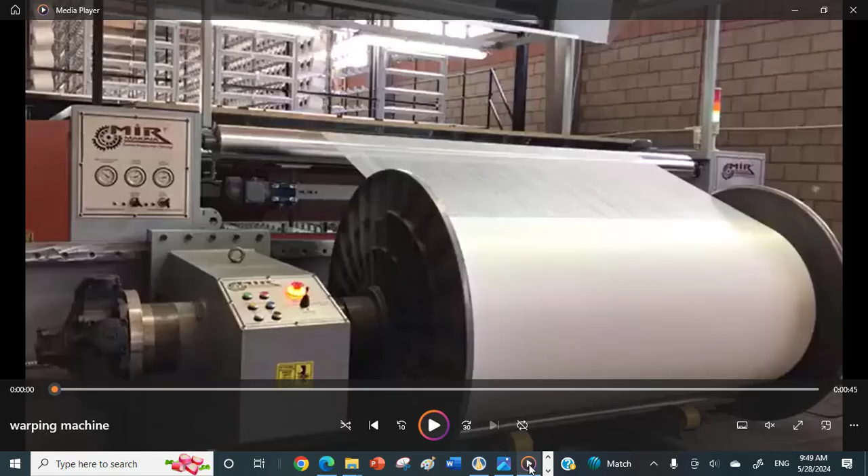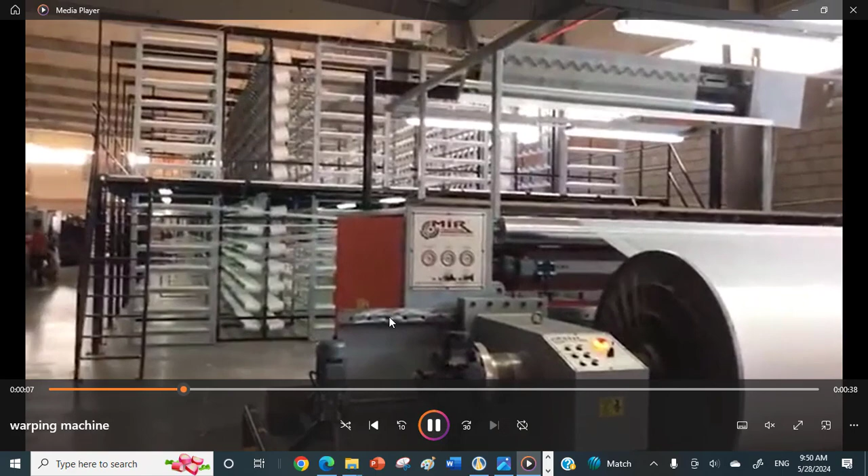So here I'm going to show you a short video about this warping machine. You can see here the beam, and this is the hydromotor - an axial, or I can say radial, piston motor - and this is the control unit. Here is the creel section, the hydromotor, the control section, and the beam.

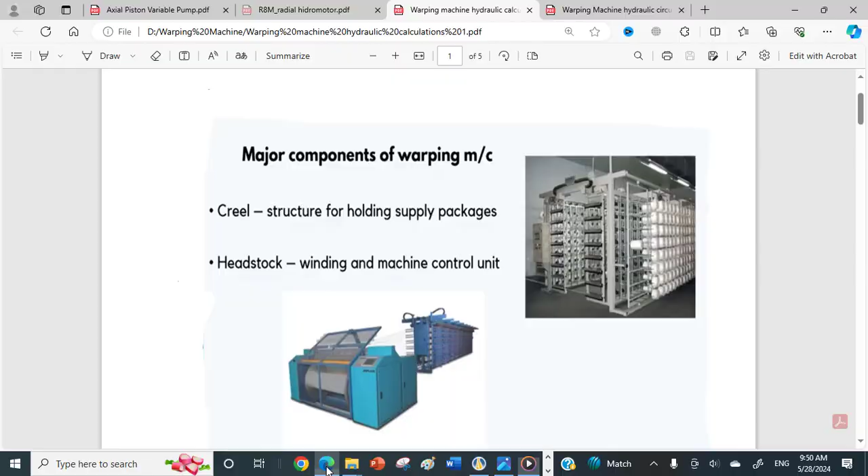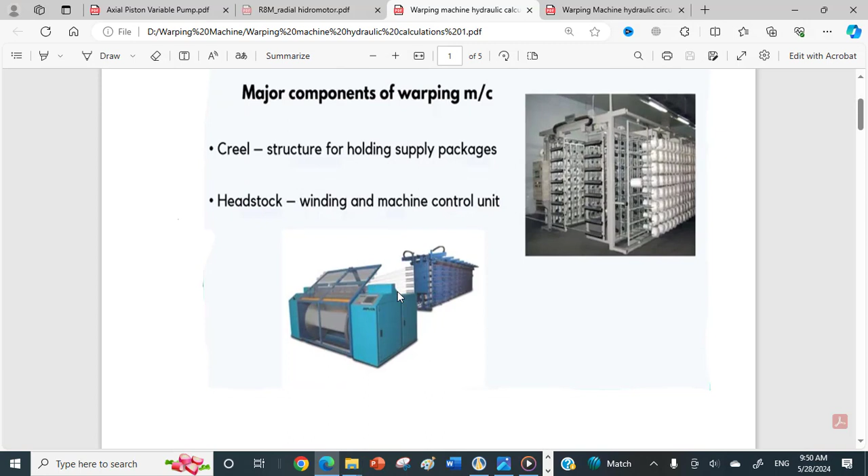So, the warping machine hydraulic circuit is like this. You can see here that the warping machine has this hydraulic circuit. This hydraulic circuit is composed of two sections.

The first circuit is for the hydromotor - as you saw in the video, this hydromotor has to be driven by a hydraulic pump and electromotor. And the second one is for the positioning of this drum or beam.

So this one is an arm, a hydraulic arm or hydraulic cylinder, which is used for lifting and positioning the warp drum, adjusting the tension, and loading and unloading this beam.

In this video, I will not talk about this section. In the second part, I will talk about this section. But in this first part, I will talk about the hydromotor circuit.

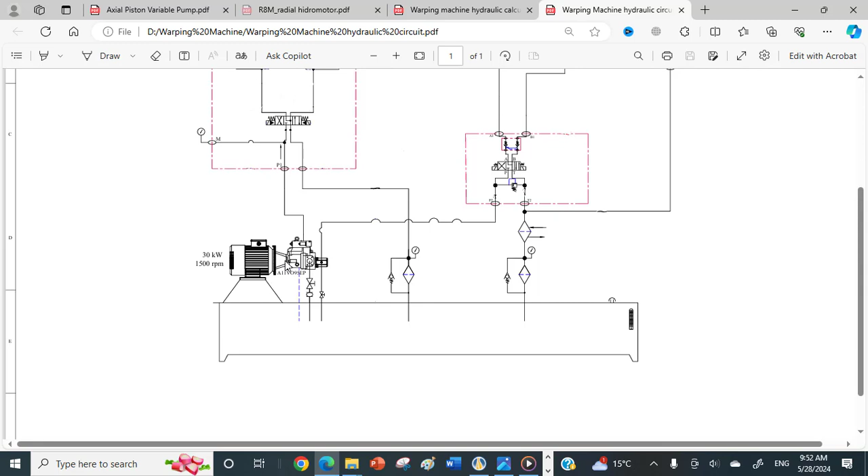As you see here, this is the tank, and this is the electromotor. The electromotor is used for driving the pump, and the pump here obtains the oil from the tank and pumps the oil throughout this block.

What is inside this block? Inside this block we have a directional control valve - a four-way, three-position directional control valve that is operated by a solenoid. You can see here the symbol for the solenoid, and this is the symbol for the spring. It means it is operated by a spring and the solenoid.

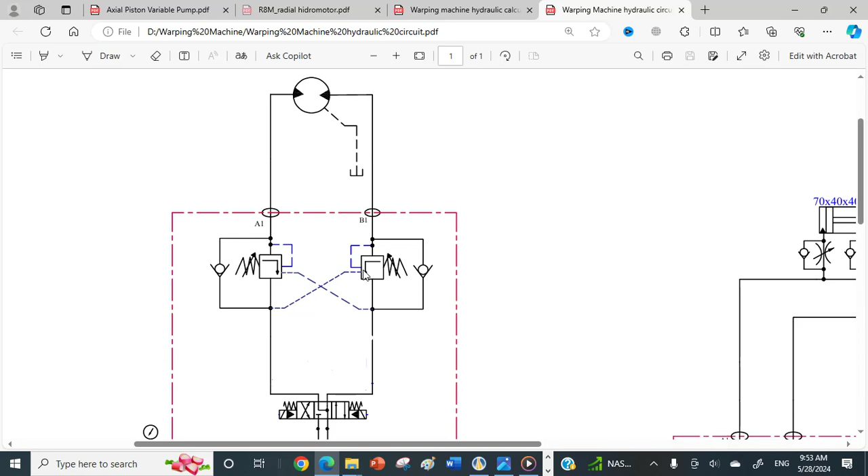And what are these? These are the counterbalance valves, used for braking this hydromotor after it's been stopped. I will explain in the next section why we are using these counterbalance valves and how they are operated. So all of these counterbalance valves, the directional control valve, and the pressure meter are located, and all of these ports are located inside a block.

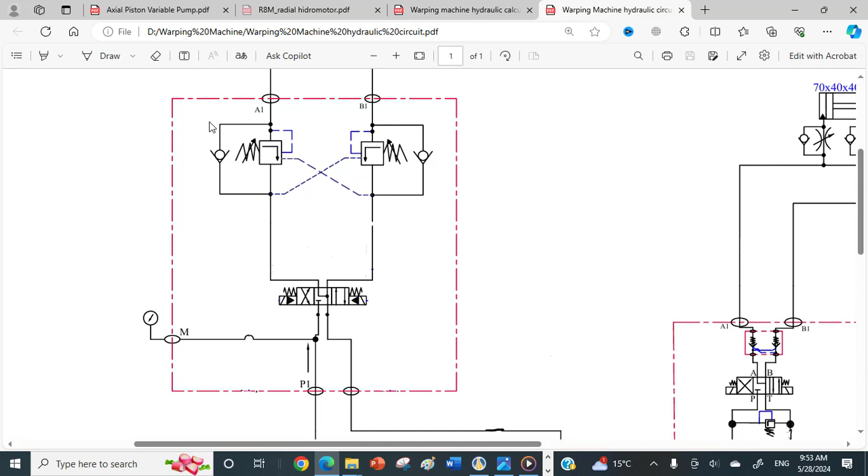Let me explain the counterbalance here. What is this counterbalance? As we know, when we keep the lever of this four-way three-position directional control valve in the middle position, the motor will stop. Obviously, the motor will stop because all of these ports are connected to each other, and there is no pressure here.

Even if there is pressure from the pump, it will go back - the pressurized oil will go back to the tank. So in this section, whenever the directional control valve is in this position, we have two main issues.

The second issue is that the motor may overrun due to an overrunning load, and the load may fall, because this hydromotor is connected to a shaft and to the drum or beam. Obviously, the drum and shaft are very heavy, and they can fall, or because of inertia, the motor continues to rotate for a considerable amount of time before it comes to rest.

It means that whenever the motor is running in reverse or forward direction and we stop the motor, the motor, because of its own inertia, will continue to rotate, and that is a problematic issue.

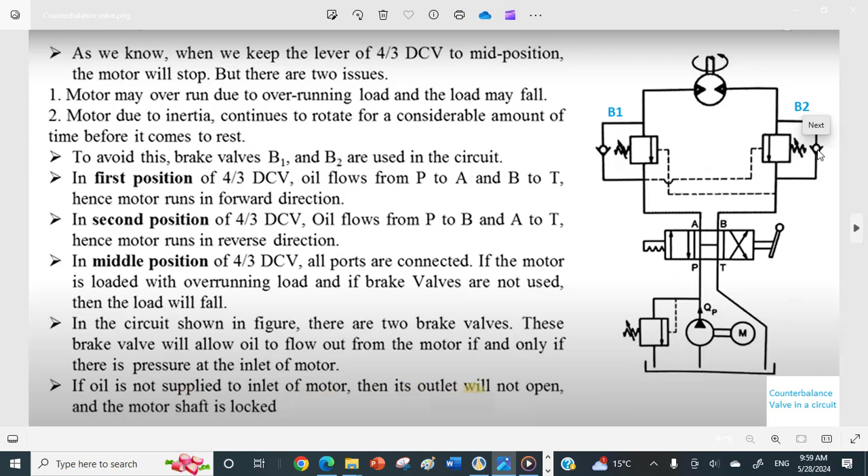And again here, this pilot operated valve, since there is no pressure here, the pilot oil will not make this valve open. And again, this check valve here is already closed, so the oil will be trapped. So the motor itself and its shaft will have no space to rotate, and it will be locked in place after being stopped, after we change this directional control valve to the middle position.

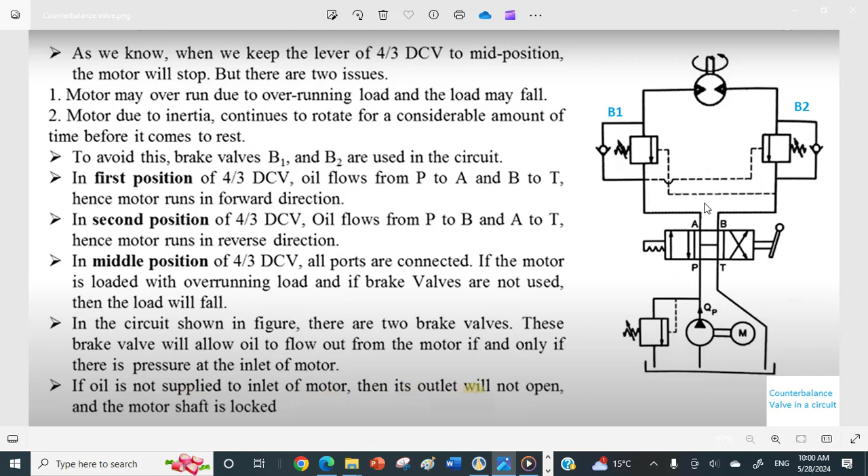So in the next section, we want to discuss how we can select this hydromotor, the pump, and the electrical motor to make this circuit work. We have to calculate all of these requirements for this specific warping machine hydraulic system.

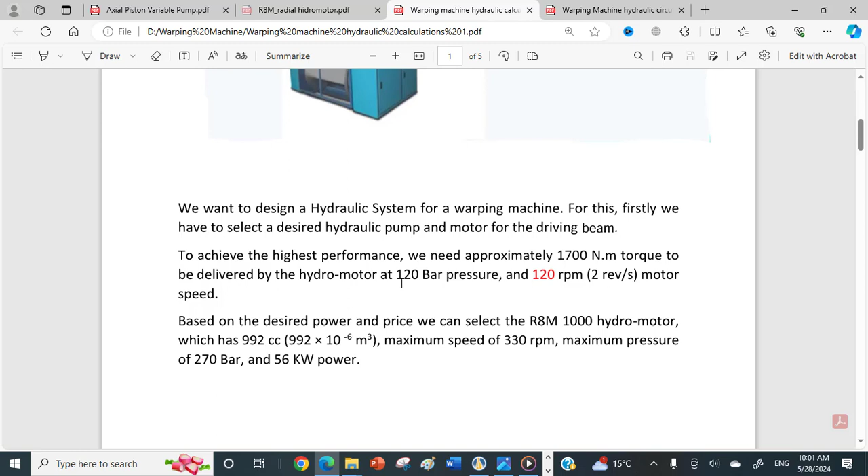So here, we want to design a hydraulic system for a warping machine. For this, firstly, we have to select the desired hydraulic pump and motor for the driving beam. To achieve the highest performance, we need approximately 1,700 Newton meter of torque to be delivered by the hydromotor at 120 bar pressure and 120 RPM, which means 2 revolutions per second motor speed.

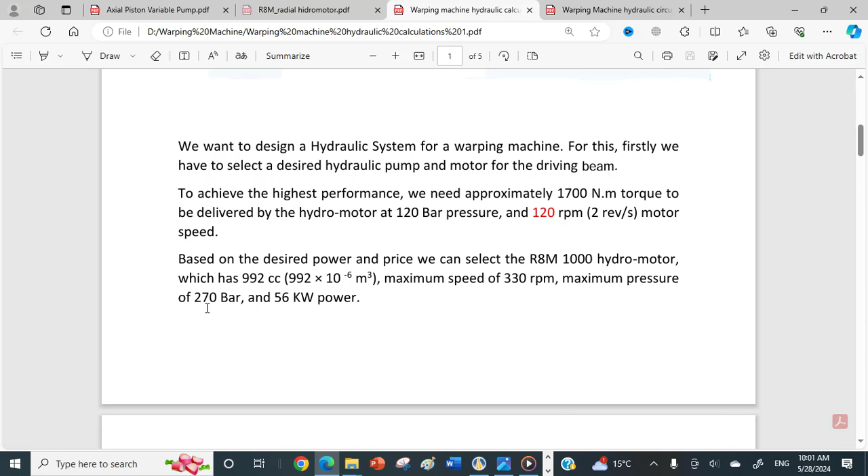Based on the desired power and price, we can select the R8M1000 hydromotor, which has 992 cc, equal to 992 multiplied by 10 to the power of -6 cubic meter. Maximum speed of this motor is 330 RPM and maximum pressure is 270 bar and 56 kilowatt according to its data sheet. This is the technical data sheet of this motor.

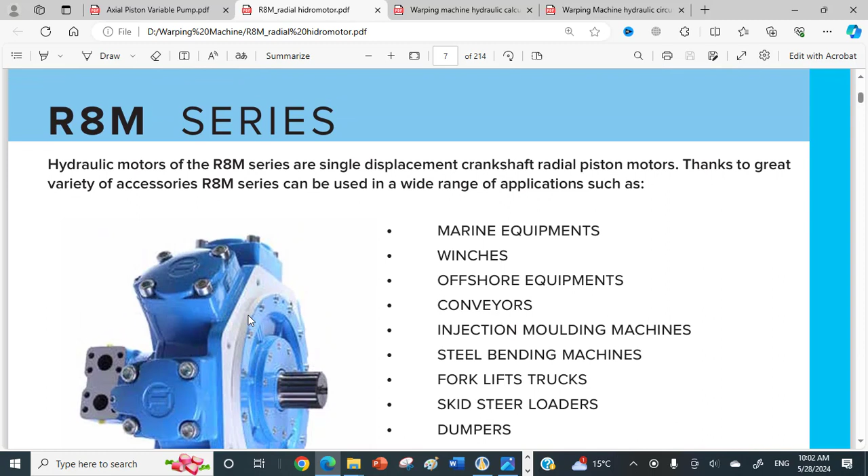These motors are applied in marine equipment, winches, conveyors, injection molding machines, steel bending machines, dumpers, agricultural and forestry machines, airport machinery, etc.

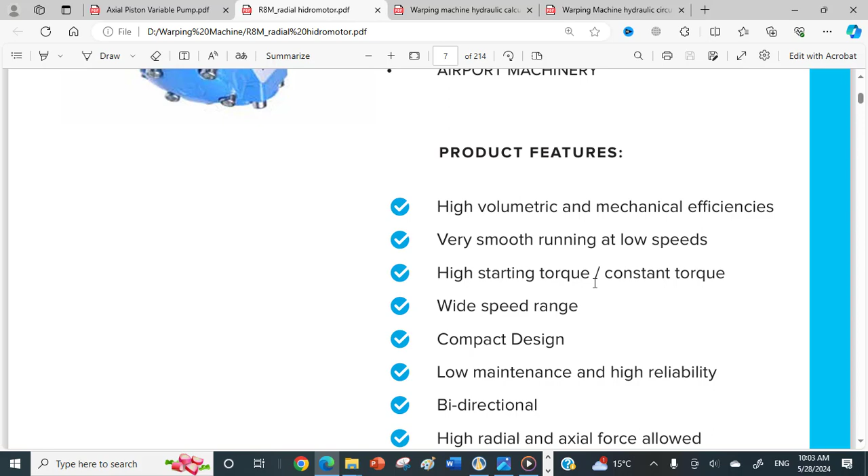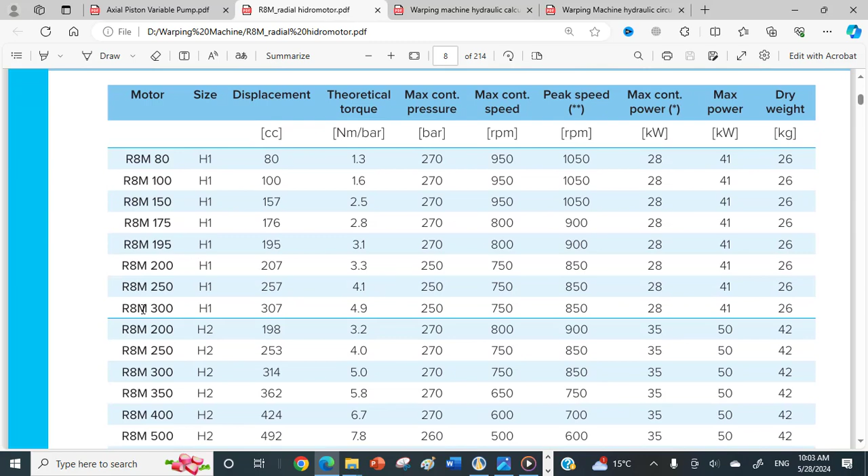So you can use this, and it has such product features: high volumetric and mechanical efficiency, very smooth running at low speeds, high starting torque, constant torque, wide speed range, and etc. All of these series of motors have been provided here with their technical data.

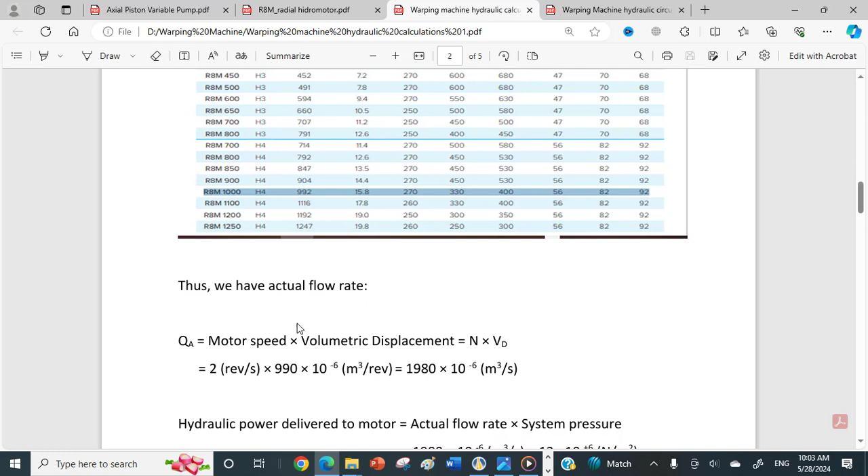So we just selected this one. Accordingly, we have actual flow rate. How can we calculate the actual flow rate? The calculation of actual flow rate is very easy. It is equal to motor speed multiplied by volumetric displacement, which is equal to N multiplied by VD, or volumetric displacement.

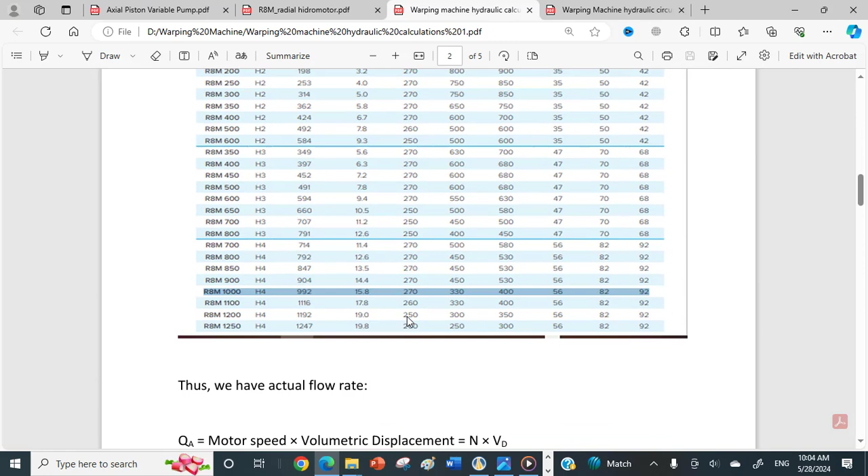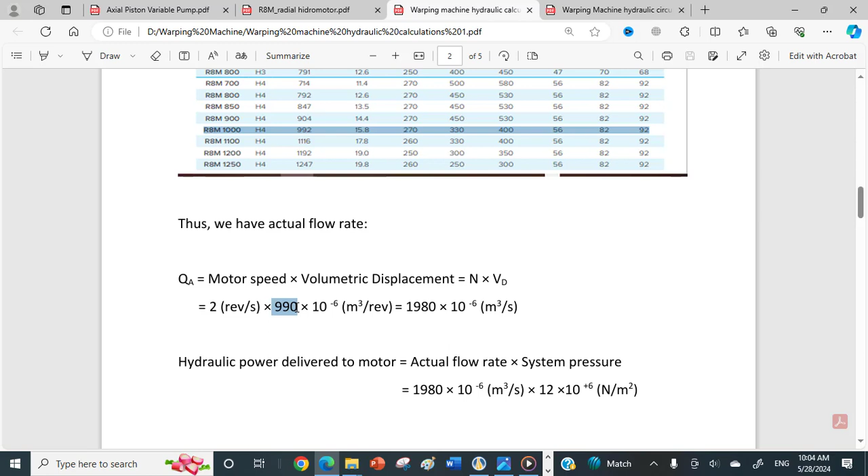So we already know that the motor speed is 2 revolutions per second, which is equal to 120 RPM, multiplied by 990, multiplied by 10 to the power of minus 6 cubic meter per revolution, which is equal to 1980 multiplied by 10 to the power of minus 6 cubic meter per second. So here we just converted cc to cubic meter.

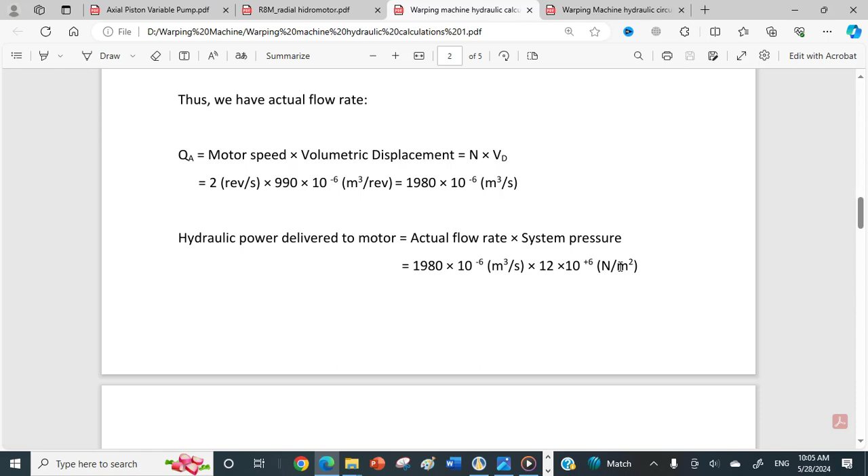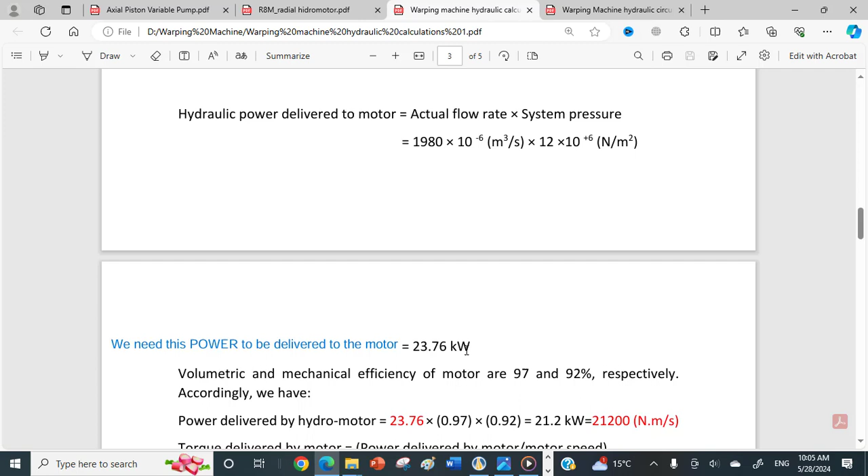So hydraulic power delivered to motor is equal to actual flow rate multiplied by system pressure, which is equal to 1000. We already calculated the actual flow rate, which is equal to 1980 multiplied by 10 to the power of minus 6 cubic meter per second multiplied by 12 multiplied by 10 to the power of 6 Newton per square meter. This is the 120 pressure bar, and we have converted 120 pressure bar to Newton per square meter. So the hydraulic power delivered to motor is equal to 23.76 kilowatt. It means that we need this power to be delivered to the motor.

This power is delivered to the motor by what? Obviously, it is delivered by the pump. You see here, this pump has to deliver 23.76 kilowatt to the motor.

So volumetric and mechanical efficiency of the motor are 97% and 92% respectively. Therefore, we have power delivered by the hydromotor. We get this 23.76 power from the pump. It's delivered to the motor, and the motor itself will deliver power for us, obviously.

So this power can be calculated using its volumetric efficiency and mechanical efficiency, which is equal to 23.76 multiplied by 0.97 multiplied by 0.92 mechanical efficiency, which is equal to 21.2 kilowatt. That is equal to 21,200 Newton meter per second, because we converted kilowatt to Newton meter per second.

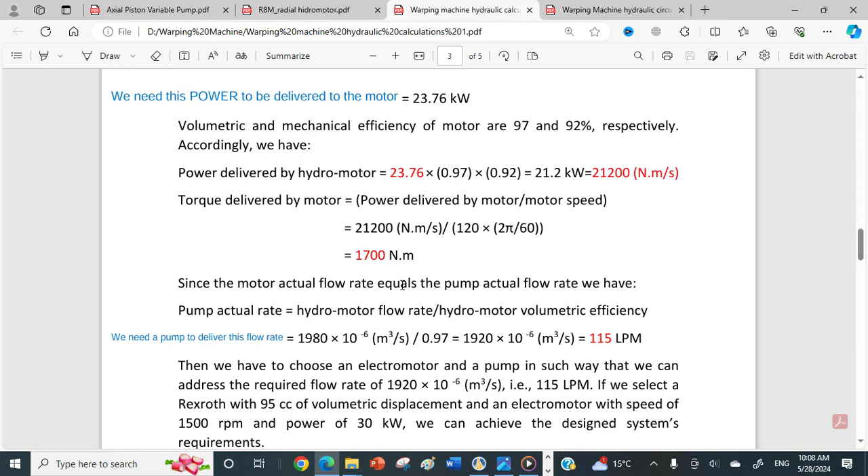Since the motor actual flow rate, this is very important here. This one is extremely important. We have the motor actual flow rate is equal to the pump actual flow rate. Again, the motor actual flow rate is equal to the pump actual flow rate. So accordingly, we have pump actual flow rate is hydromotor flow rate divided by hydromotor volumetric efficiency.

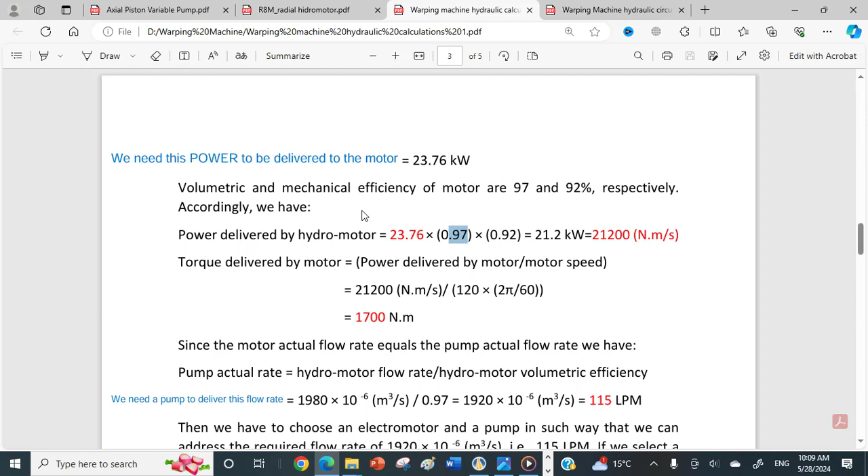So it is equal to 1980 multiplied by 10 to the power of minus 6 cubic meter per second divided by 0.97 volumetric efficiency of this hydromotor, or our radial piston hydromotor, which finally gives us 1920 multiplied by 10 to the power of minus 6 cubic meter per second, which is equal to 115 lpm, or liters per minute.

Then we have to choose. So what does it mean? This means that we need a pump to deliver this flow rate for us.

We have to select a pump which can deliver this kind of LPM flow rate for us. We have to choose an electromotor and a pump in such a way that we can address the required flow rate of 115 lpm, which is equal to 1920 multiplied by 10 to the power of minus 6 cubic meter per second.

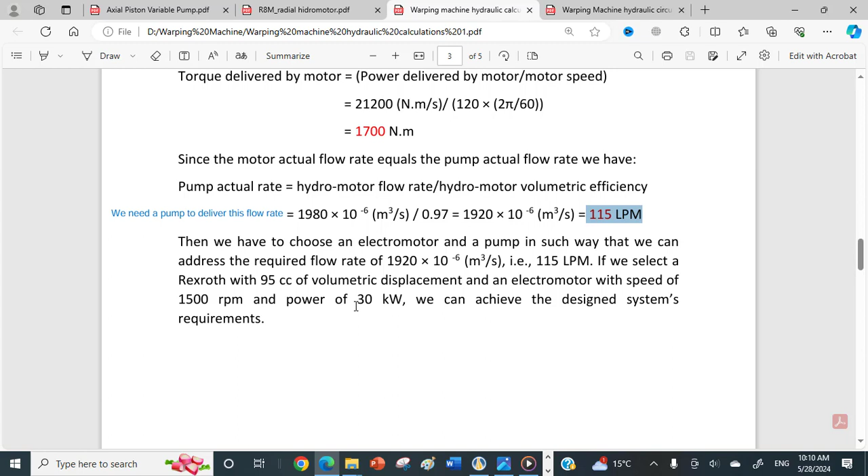So if we select a Rexroth with 95 cc of volumetric displacement and an electromotor with a speed of 1500 rpm and power of 30 kilowatt, we can achieve the designed system's requirement.

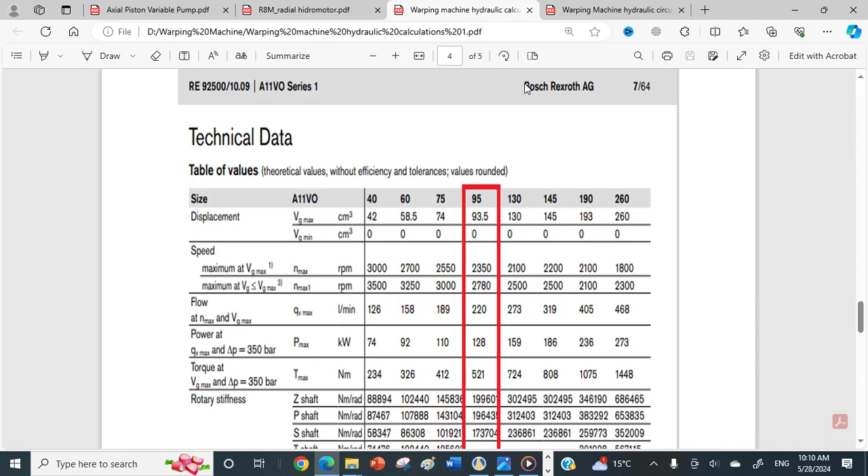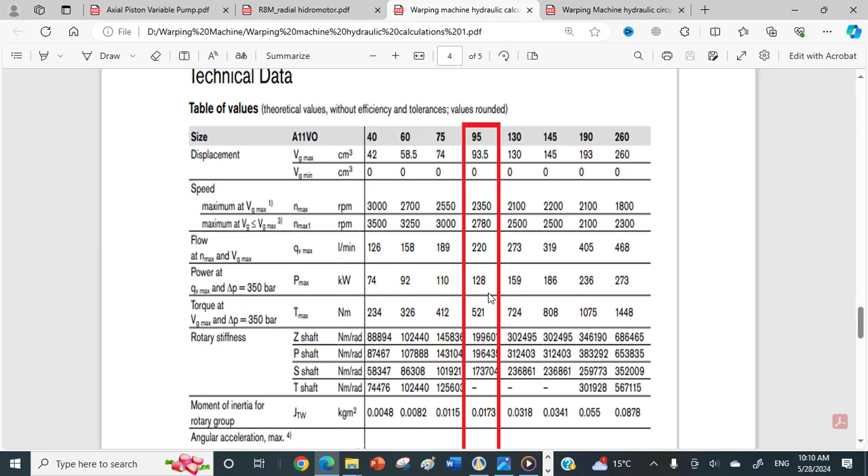Look here, this is the data sheet, the technical data of this A11VO series of Bosch Rexroth pumps. The size is 95 and maximum speed is 2350. All of the other power, 128, torque for all of them are provided here. And this is the catalog itself.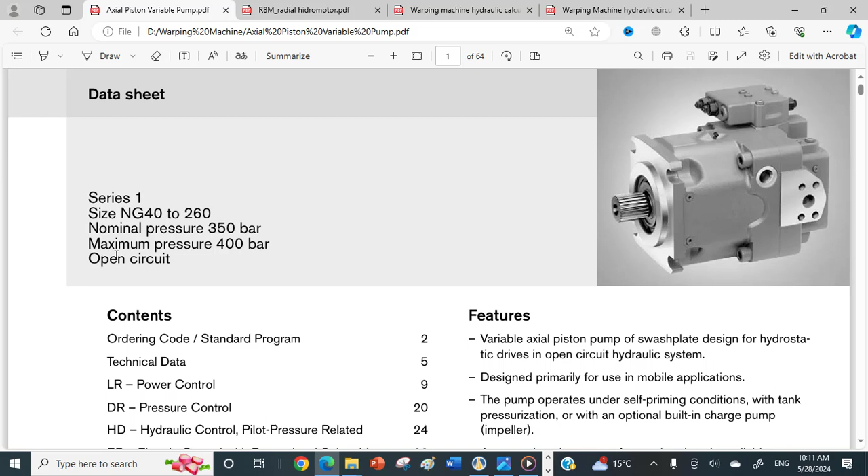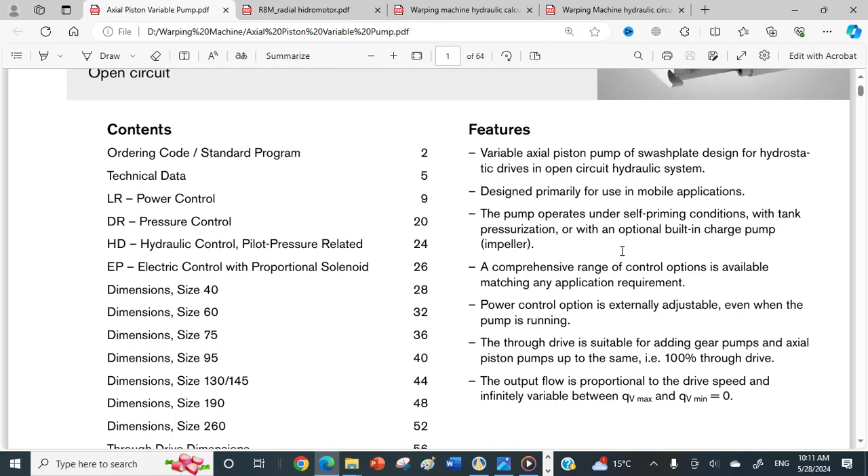You can see that nominal pressure is 350 bar and maximum pressure is 400 bar. That is used in open circuits. So it's a variable axial piston pump of swash plate design for hydrostatic drives in open circuit hydraulic systems. These are the features. You can download that and review the technical data of these series of pumps.

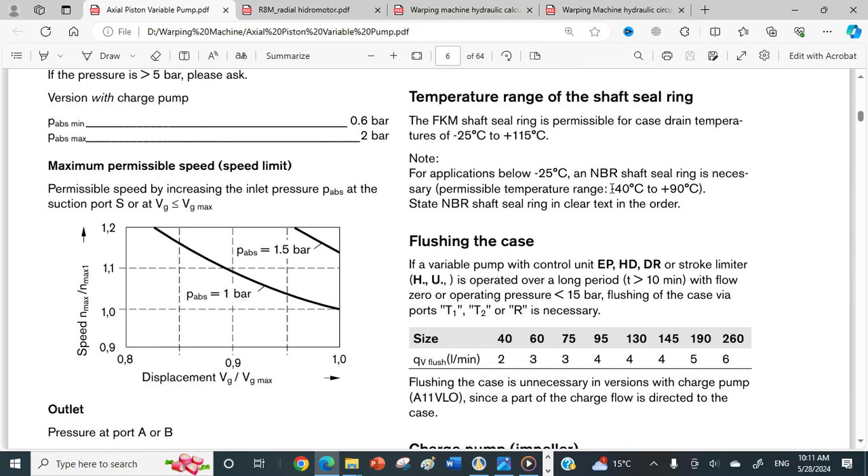You can see here all of this data has been provided, and I have taken my pictures from this page.

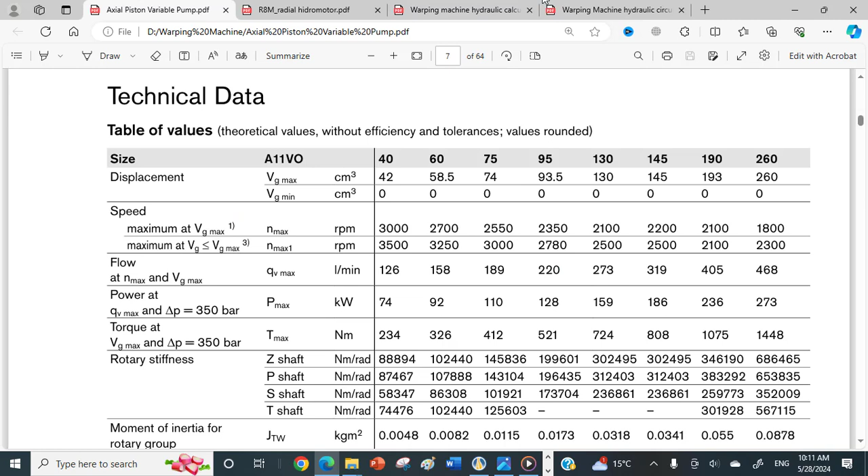So here we have to examine why our selection is correct. If I'm telling you I have to select this one, why is this idea correct? We have to calculate to see if this one satisfies our requirement or not.

Pump theoretical flow rate equals pump volumetric displacement multiplied by pump speed. Here the pump volumetric displacement, theoretical displacement, is 93.5, but obviously at a speed of 2350 we will not achieve this one. This is the maximum one. We need, we can have 80 cc, which is reasonable for our requirement, because as I said, we will not achieve this maximum all the time.

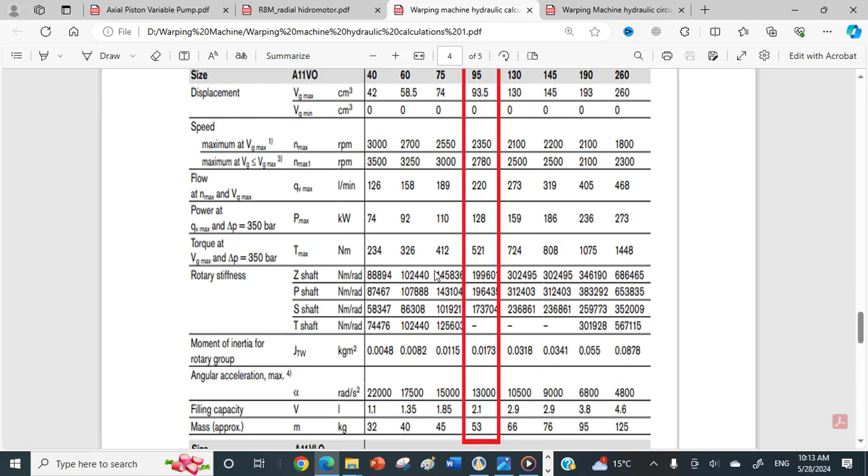If we have 80 multiplied by 10 to the power of minus 6 cubic meter per revolution, multiplied by 1500 revolution per minute, we can calculate our pump's theoretical flow rate. Now, why did I select this pump speed of 1500?

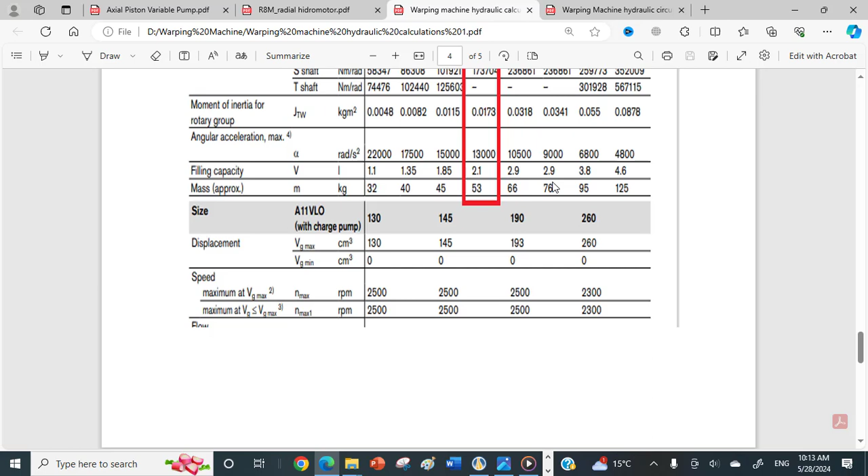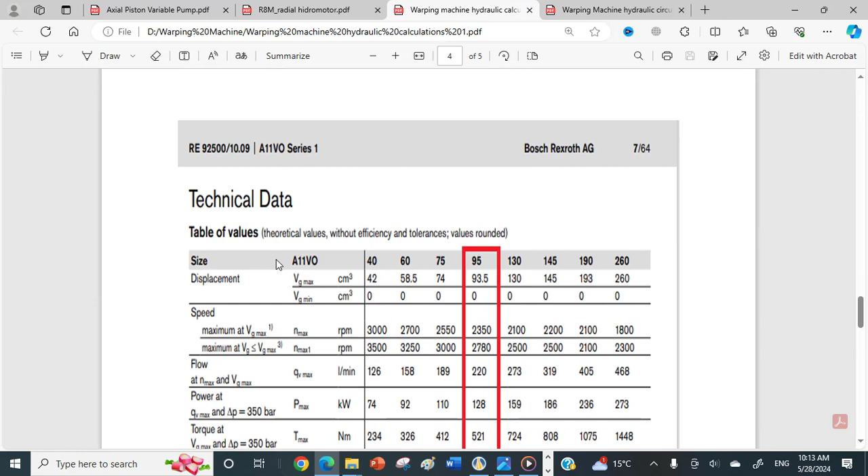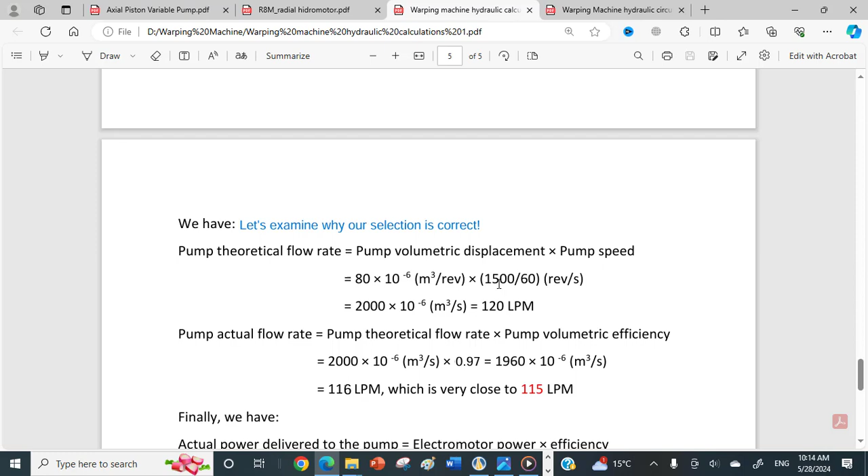So if we select this pump speed as 1500 revolution per minute, and this pump volumetric displacement of 80 multiplied by 10 to the power of minus 6 cubic meter per revolution, we will have 2000 multiplied by 10 to the power of minus 6 cubic meter per second, which is equal to 120 lpm. Accordingly, we have to calculate the pump actual flow rate.

That one was theoretical flow rate. Pump actual flow rate is calculated by pump theoretical flow rate multiplied by pump volumetric efficiency, which is 0.97. We already calculated the theoretical flow rate, which is 2000 multiplied by 10 to the power of minus 6 cubic meter per second, multiplied by 0.97. Finally it is equal to 1960. I think here it's not correct.

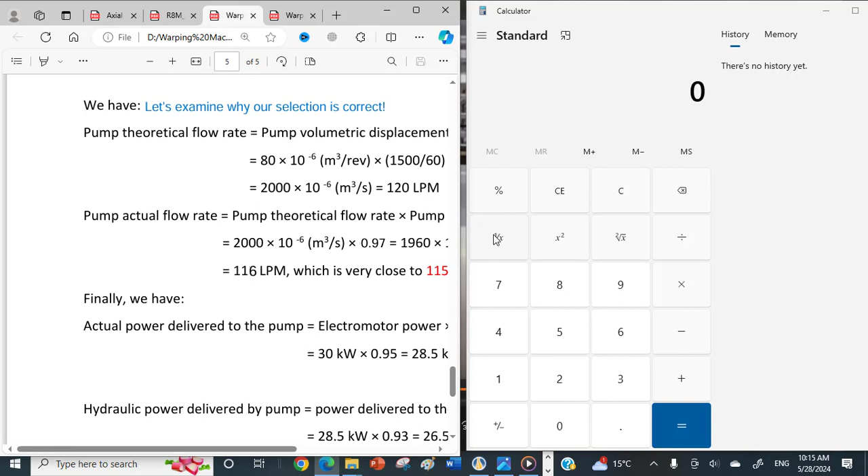It should be 1940, because I already calculated this one. Let me calculate it again, maybe I'm wrong. So here we can say that 2000 multiplied by 0.97 is equal to what? Oh yeah, 1940. So I can say that this is not correct.

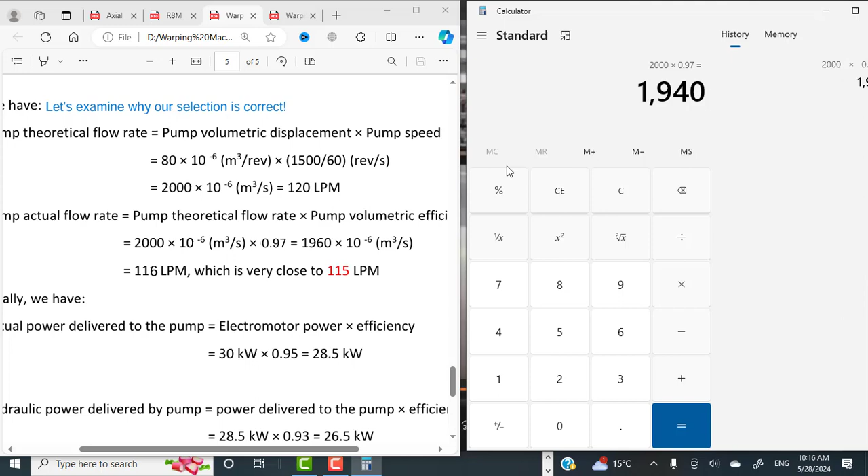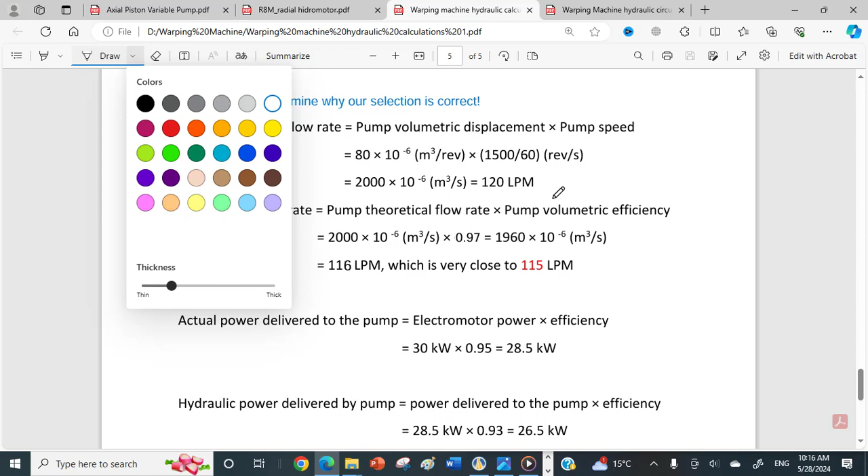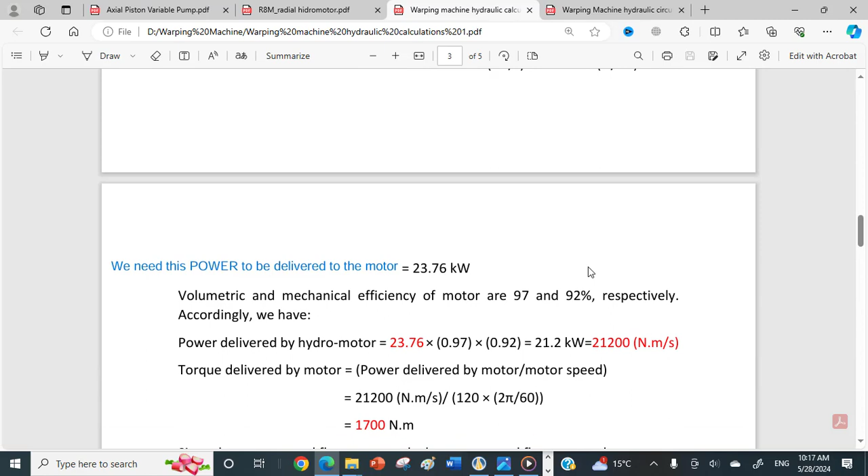So I can use that, I can select this one. 1940 multiplied by 10 to the power of minus 6 cubic meter per second, which is equal to 116 lpm. This is very close to the 115 lpm we needed, as I said, to deliver this flow rate for the hydromotor.

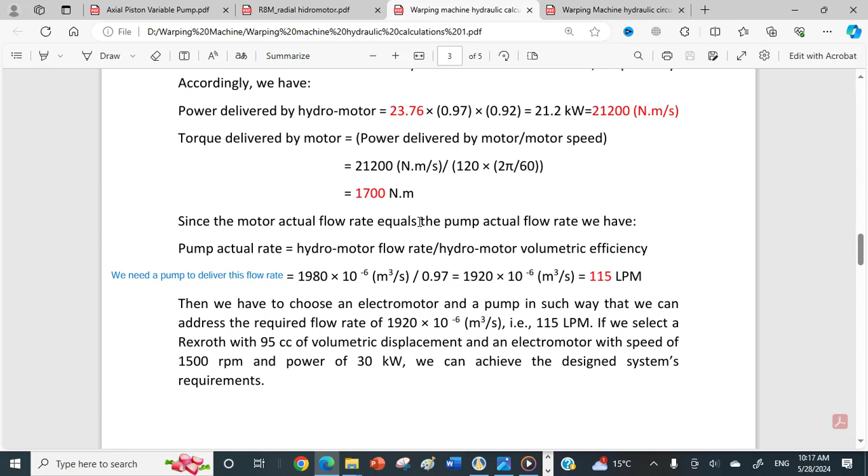So we can say that our selection was almost correct, because it is just 1 lpm more than our requirement.

If 1 LPM is more than 115 LPM, it's very good. It is satisfying our requirement.

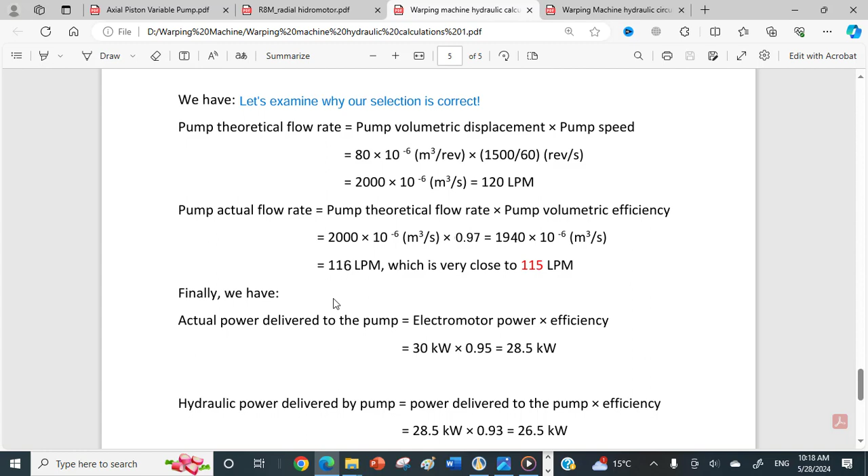So finally we have actual power delivered to the pump, which equals electromotor power multiplied by efficiency. Here electromotor power, as I said in the previous page, equals 30 kilowatt multiplied by its efficiency, equal to 0.95, which equals 28.5 kilowatt. So hydraulic power delivered by pump to the hydromotor equals power delivered to the pump multiplied by efficiency, which, this actual power delivered to the pump, again multiplied by the pump efficiency, equals 28.5 kilowatt multiplied by 0.93, which finally equals 26.5.

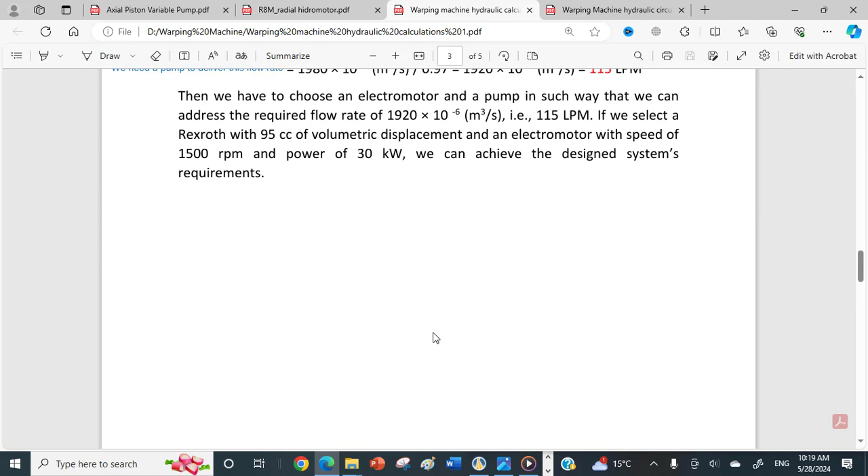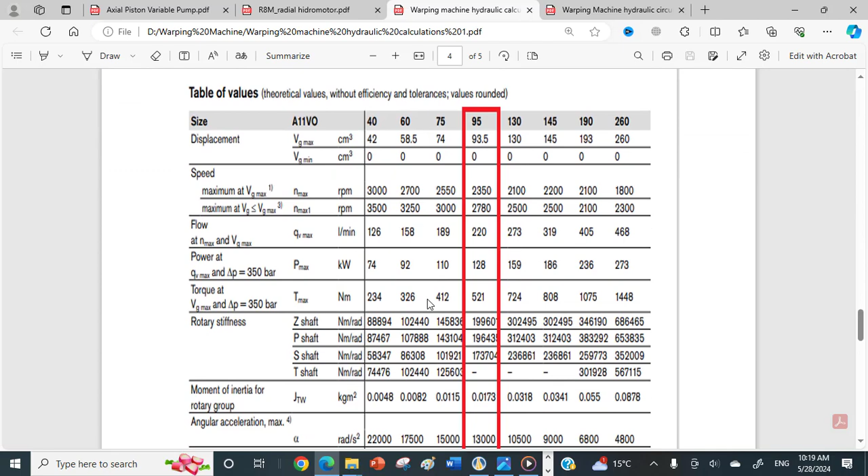So hydraulic power delivered to the hydromotor should be 23.76. We need this power to be delivered to the pump: 23.76. So here we achieved the hydraulic power delivered by pump is 26.5, which is very close to, even a little more than, 23.76, which means it is very satisfying to our requirement. Finally, we can say that our selection of pump and electromotor satisfies the design requirements.

So far I have explained the definition of the warping machine, its components, and I showed you the video of the radial piston motor and its application in the warping machine system. I explained the hydraulic system circuit, the counterbalance, and the calculation and requirements of the system.

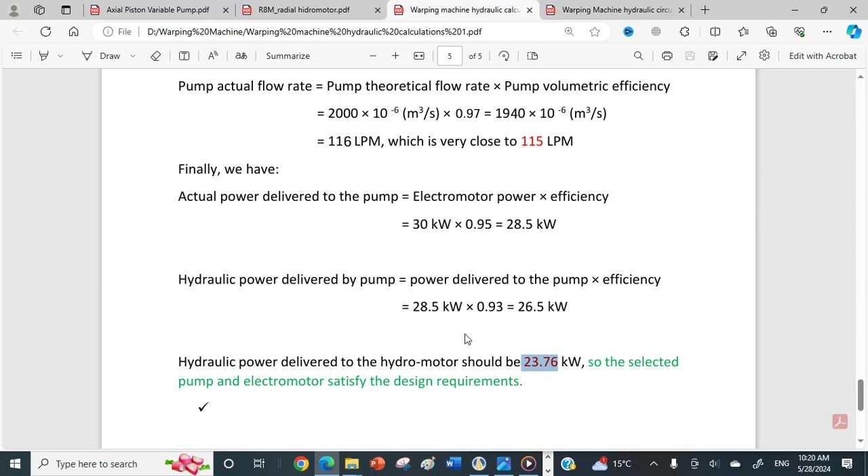Finally, I'm going to show you the simulation of the controlling system using the Automation Studio software.

I'm not going to explain the entire Automation Studio software because you may already have information about it. If you don't have, I will prepare another video explaining this Automation Studio software for designing hydraulic systems and even the PLCs used for controlling this hydraulic system.

This is a very handy, very useful software. So I already have designed this. This is a very simple design, just for education, because in reality it is much more complex than this.

You can see here the actual hydraulic circuit, and this is what we can call the PLC. So I'm going to run this system for you.

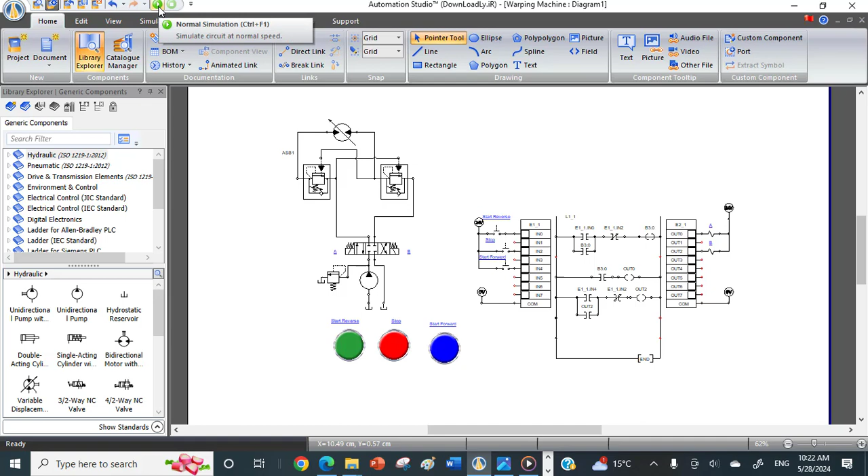You can see here the hydraulic pump, a 3-position directional control valve operated by solenoid and controlled by the PLC, the counterbalance valves, and the hydromotor. And this is the HMI, human machine interface.

If we start forward, you can see what happens. When we click start forward, this input was activated, which made the ladder program activate the output accordingly. Whenever output B is activated, it connects to the input of this directional control valve and opens it. The pressurized hydraulic oil is connected to this port, making the hydromotor rotate in the forward direction.

Whenever we stop, you can see that input IN2 of the PLC is green, meaning it is activated. When activated, it means the pump is stopped and the hydromotor is stopped, because of these brake systems, the brake valves.